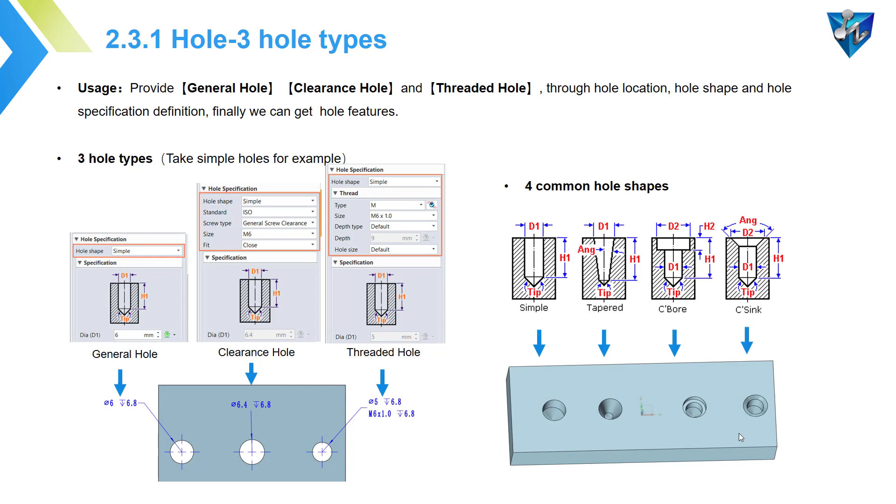And in ZW3D, we have four common hole shapes: simple hole, tapered hole, counterbore, and countersunk, which you can see in the below image.

There are some settings in the hole creation. The first one is add chamfer. In ZW3D, you can add chamfer for the holes along with the hole creation. For example, for this counterbore hole, we can add the chamfer for the start, middle, and the end side.

The second setting I'd like to show you is the tolerance. In ZW3D, you can create the tolerance for the hole. You can just type the value, like upper limit and the lower limit, and also you can use the tolerance belt to define the tolerance. And after that, you can show the tolerance in the PMI or also in the 2D sheet.

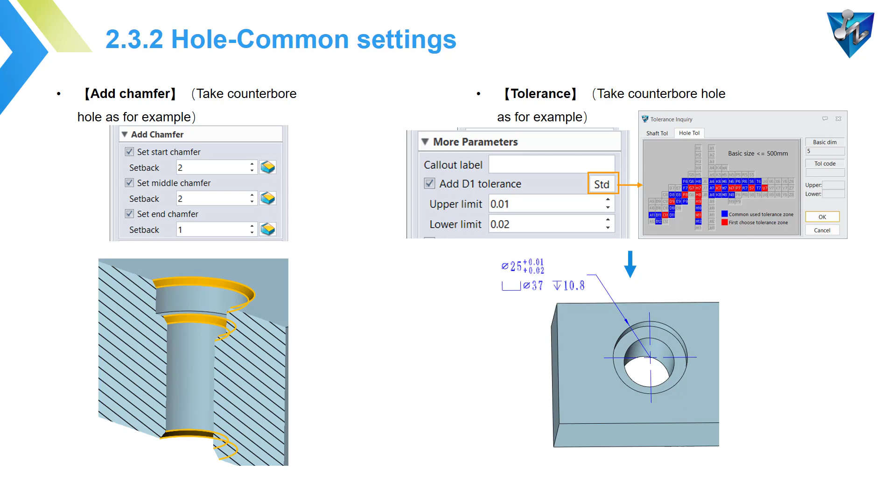And the next feature I would like to show you is the modify holes and the flag holes commands. For modify holes, it's very easy to understand. We can use this command to batch modify different types or different specification holes to a fixed type and specification. Like here in the left side, you can see there are several holes with different types, so we can use the modify hole command to change it identical.

And for flag holes command, we can use it to change the parametric free holes or Boolean holes to parametric holes. Like here, you can see we have imported shape which have no modeling history, so we can flag these two cylinder faces as hole features. You can see like this. Okay, now let's move over to ZW3D to show you more details.

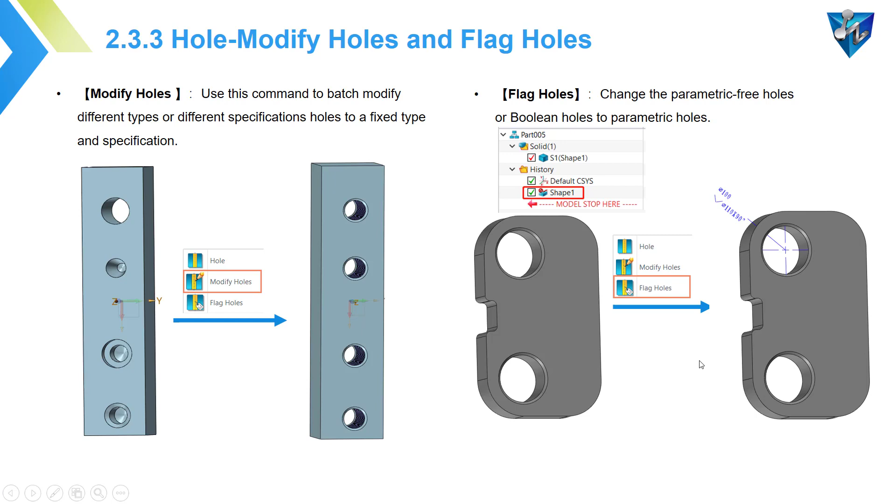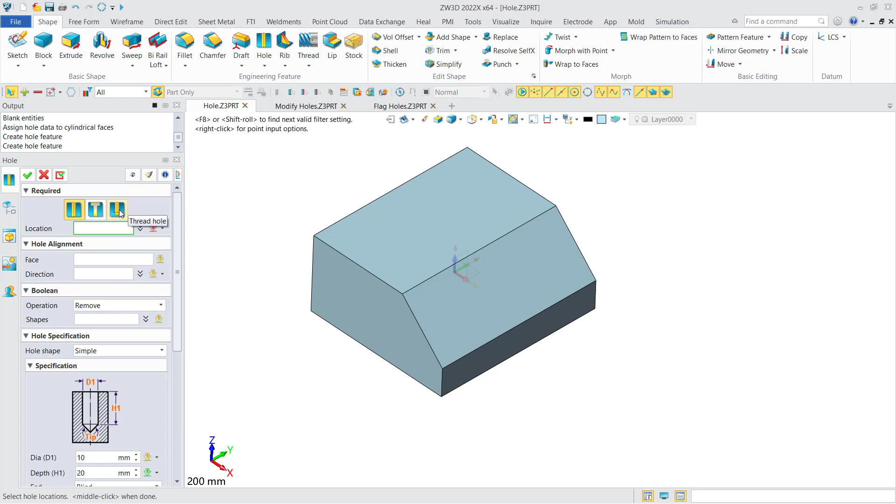Okay, here we are. So first, let's see the hole feature. Now you can see we have three hole types: general hole, clearance hole, and a thread hole. For general hole, actually it's very simple. We just define its location. Here is a little tip: in this location, you can use the right-click menu to define its location precisely.

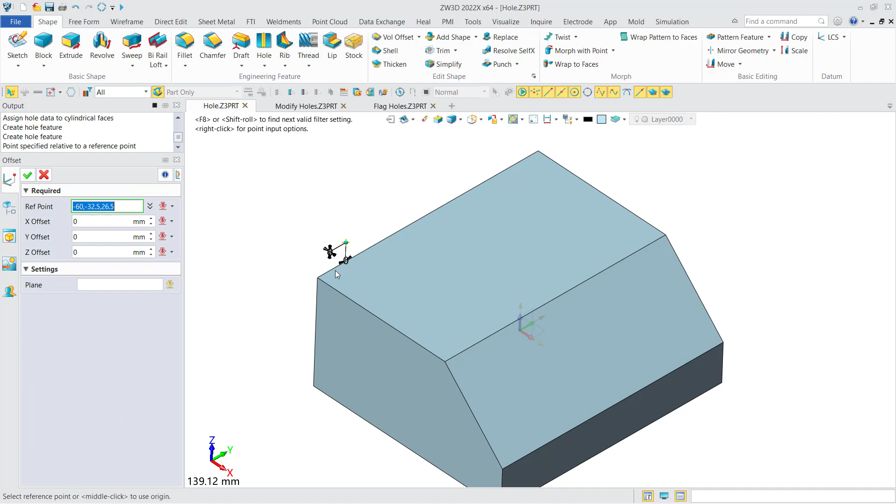Like we can make the offset. We define the ref point and the x offset and the y offset, even z offset. Okay, after that, the location will be fixed here. And next, let's see the specification.

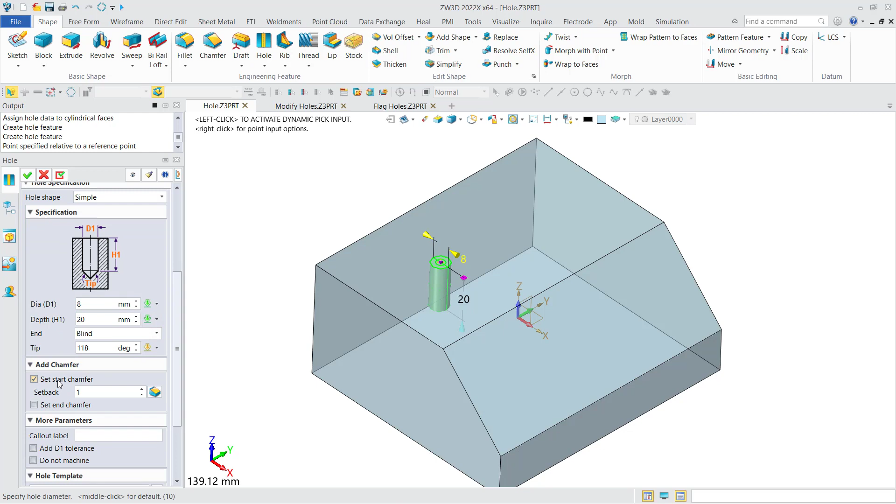Here you can see for the general hole, we just input its diameter. Like we change it to 8, and it will be smaller. And then we can add the start chamfer and end chamfer. Here we just add the start chamfer.

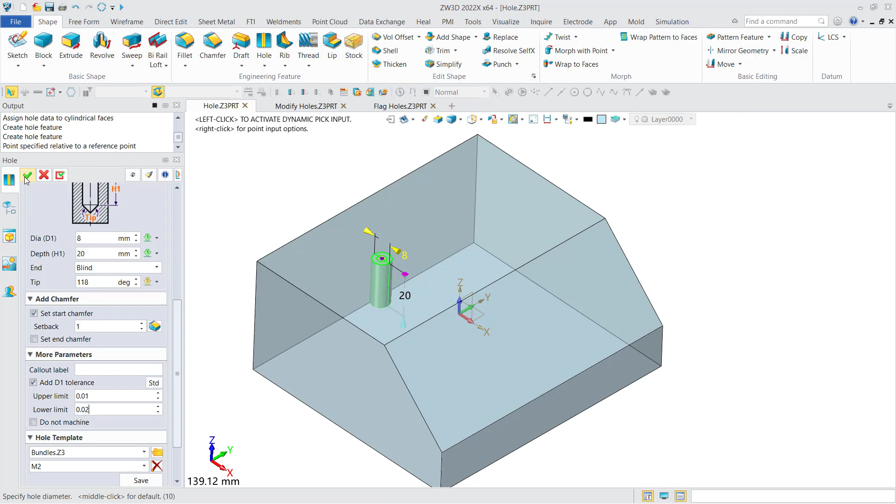And here we can add the tolerance, like the upper 0.01, 0.02. After that, we can click OK to get the result. It will be like this.

And then we can see the second type, it's the clearance hole. For clearance hole, actually, we do not need to input its diameter. All we need to do is define the screw size. Like the screw is M8, and then you can see the fit type we need to define. For close, the diameter will be 8.4. For normal, it will be 9. For loose, it will be 10. And you can also custom the diameter. Here we can use the close.

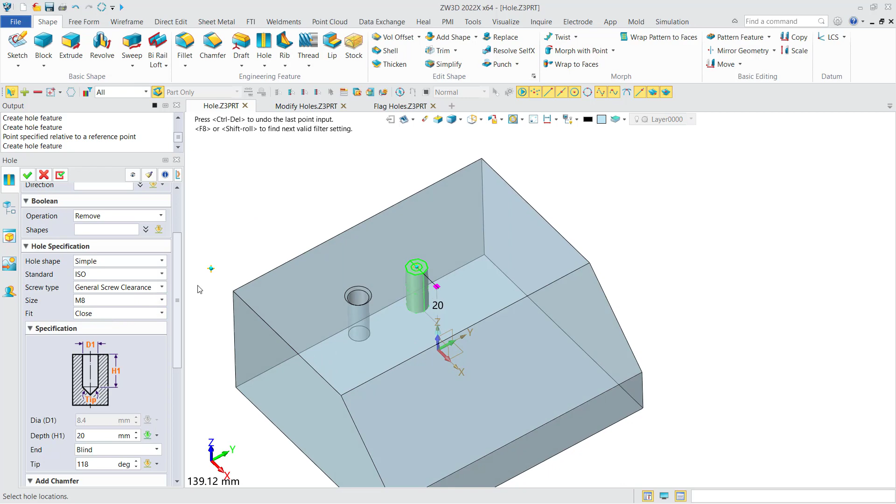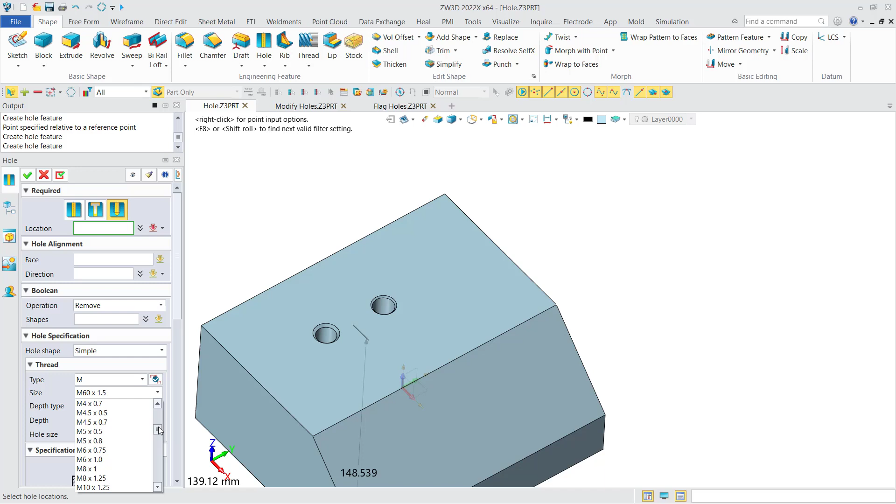And the other options are similar to the general hole. Now we can get the result. And for the last one is the thread hole. It's too big, make it M8. And we define location, and then we define the thread parameters.

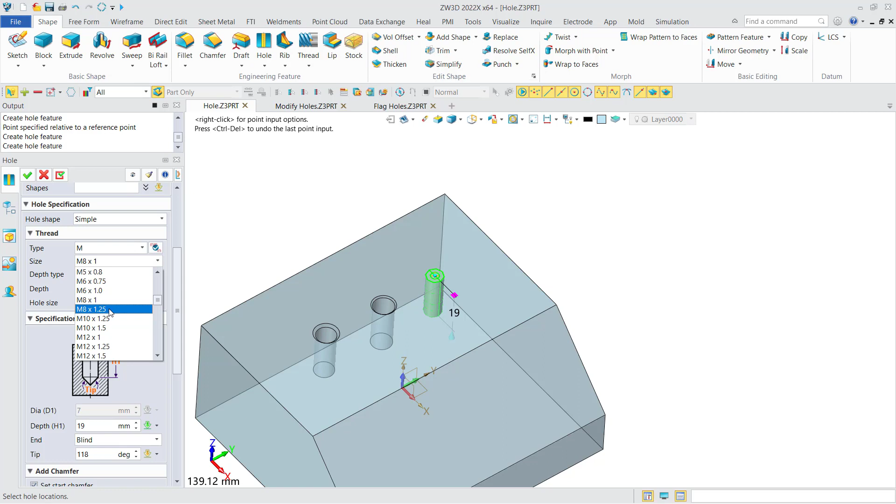Like here we can use the M8 multiplied by 1, or M8 multiplied by 1.25. Okay, now you can see the result. Now we can make the PMI for the hole to see the difference. Hole callout.

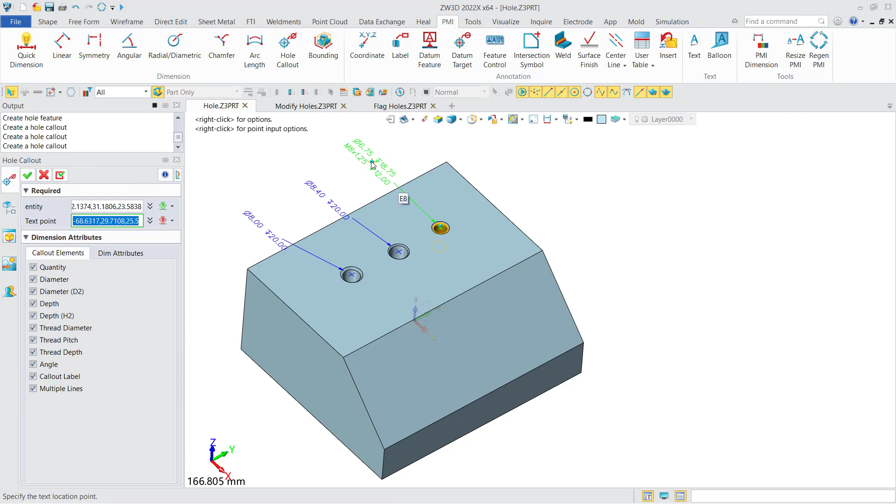Now you can see the difference between these three hole types. And there is another important option for the hole.

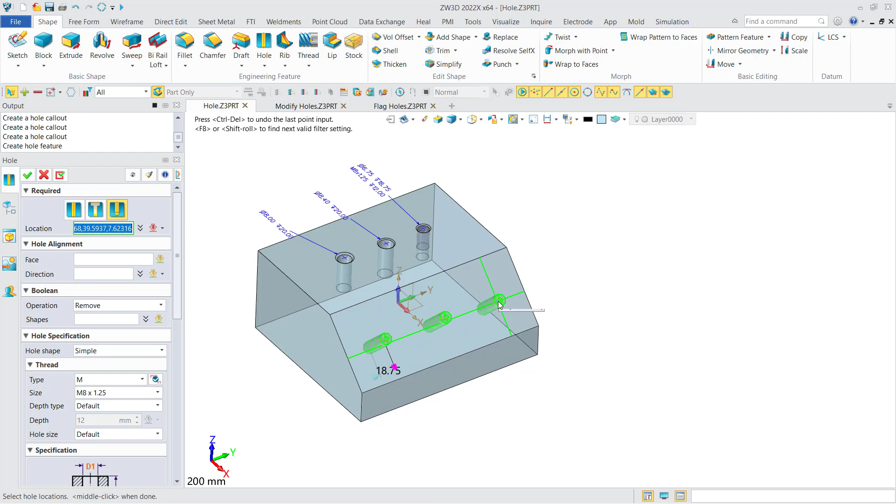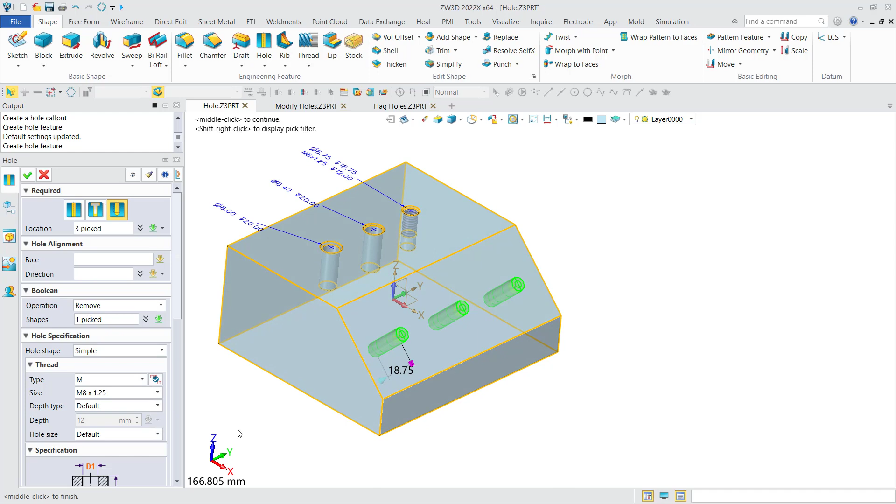It's about the hole alignment. For example, if we want to make 3 holes in this inclined face, by default the hole direction is perpendicular to the inclined face, so the result will be like this. But if we want the hole direction to be parallel to the Z direction, what should we do?

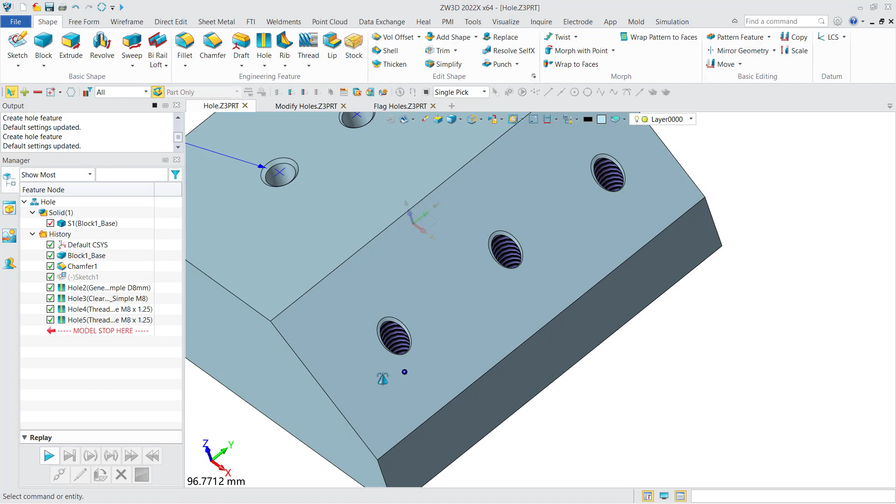Here I'll show you how to do it. In the hole alignment, we just define the direction. Here we can use the Z axis, it's -Z. Okay, now you can see the preview, it will be changed to the Z direction.

Next, I'd like to show you how to use the modify holes command. This command is used to change the parameters for multiple holes. For example, here we have 3 holes with different parameters. Now we can change them in batch. First we select the 3 holes, and then we change the hole specification.

We make it thread holes, and we make it counter bore as the hole shape, and we make the parameter M12. Then we change the height, and then we can make it through all. Now let's see what will happen.

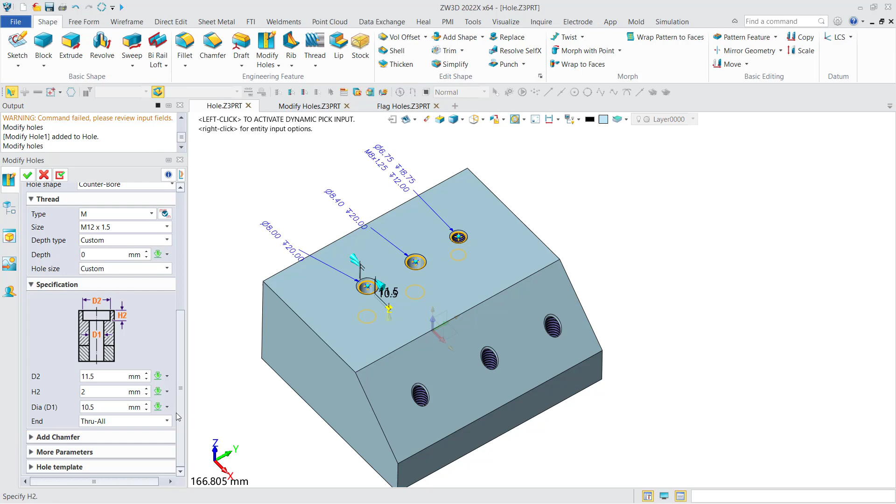Now you can see we have changed the 3 holes to a threaded hole, and they're all counter bore. So this is the usage of modify holes.

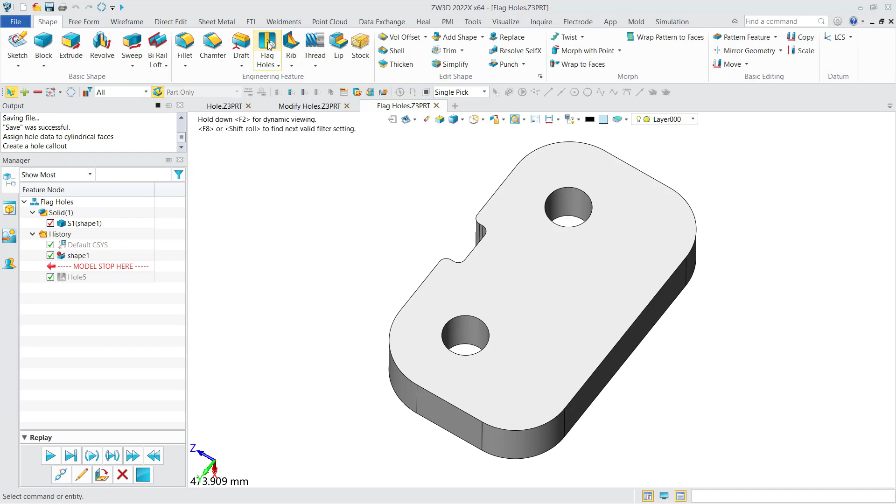Next, I would like to show you the flag holes command. We have an imported part which has no modeling history. So if you want to make the hole call out, you can see you cannot select the cylinder face because it's not a hole in ZW3D. This is where we can use flag holes. The required input is a face, the cylinder face.

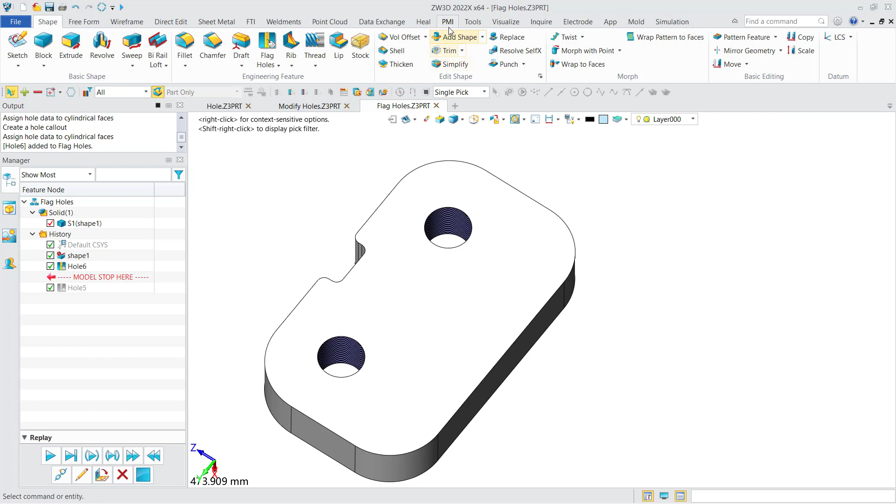And then we can define the hole specification. Here we make it M60. Now you can see it's a hole in ZW3D right now. Now if we try to make the hole call out again, you can see it succeeds.

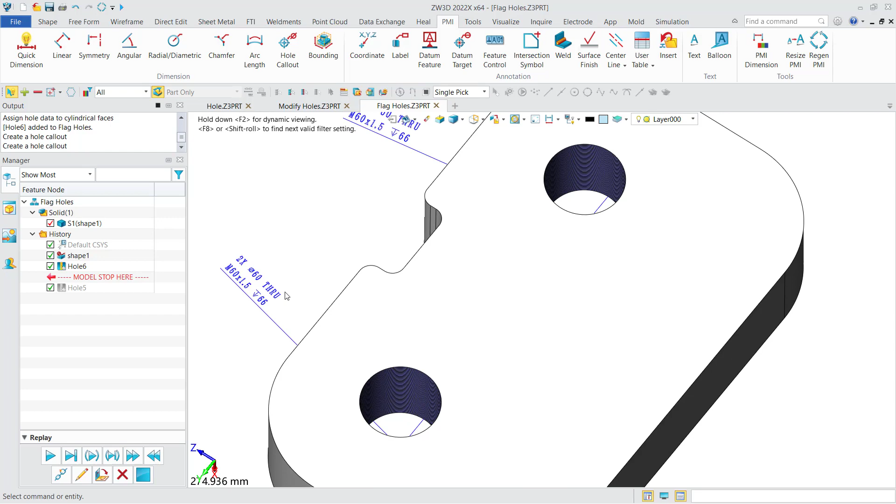The next feature I'd like to show you is rib and rib network. In mechanical design, we often need to make a rib, so in ZW3D we provide two commands to create such features. The first one is rib. We can use this command to create a single rib feature from an open profile. All we need to do is define the profile, the thickness of the rib, the draft angle, and also the boundary. Then we can get a rib feature.

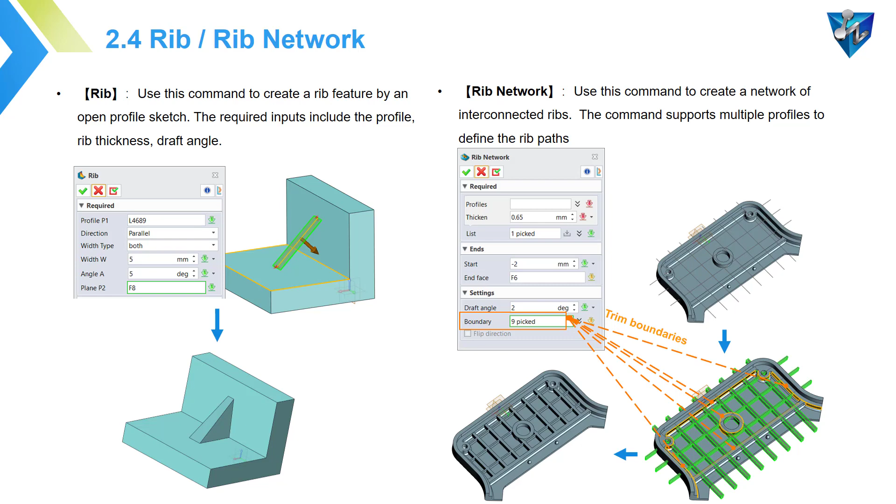For the rib network, we can use this command to create a network of interconnected ribs. We do not need to care about the length of the profile because we can trim the rib in this command. Now let's move over to ZW3D to show you more details.

First let's see the rib command. This can be used to make a single rib. Here we already have a profile. We select it, and then we can define the directions, the direction of the rib, parallel or vertical. So apparently here we need parallel.

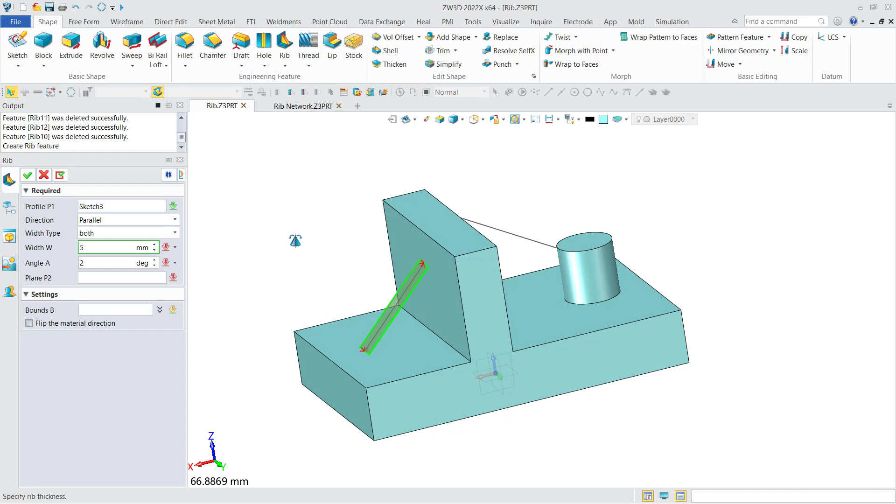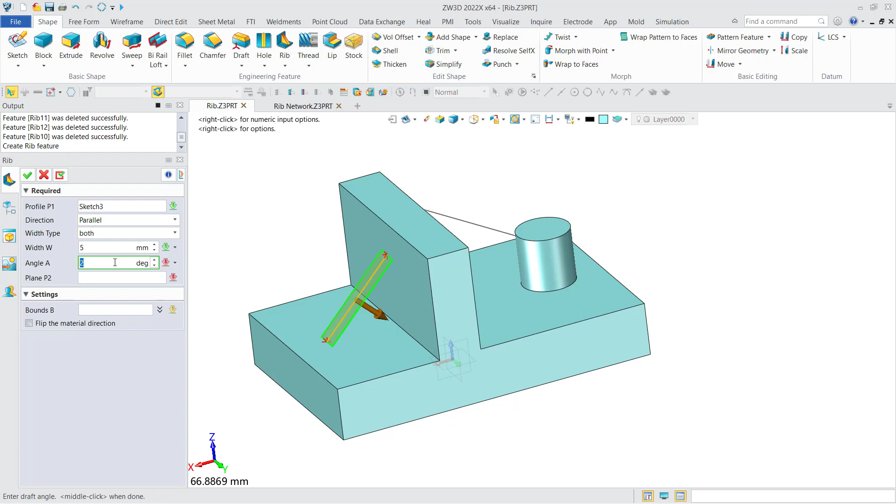And the next one is the width of the rib. We can make it bigger or smaller. Also, we can draft the rib when we're creating this feature. We can give it 3 degrees of draft. And then we define the stationary plane, this one. And then we define the boundaries.

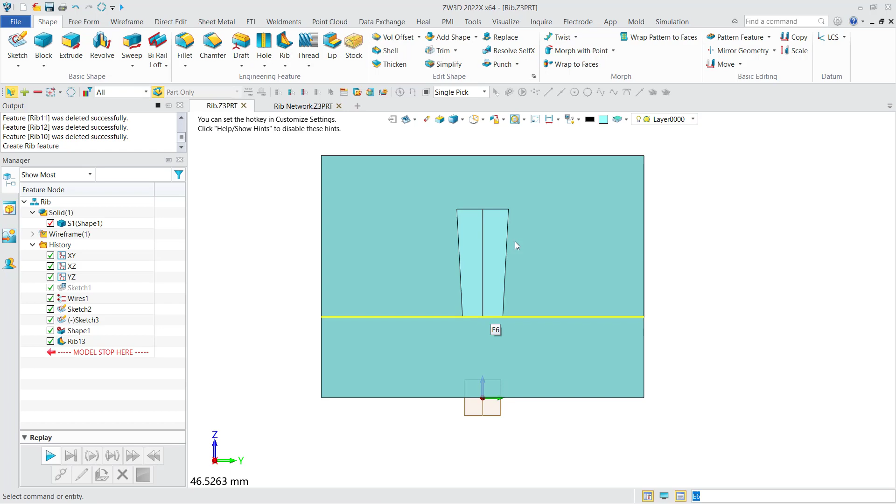Then you can see the rib feature is created, and here you can see it actually has a draft angle here. So this is very convenient.

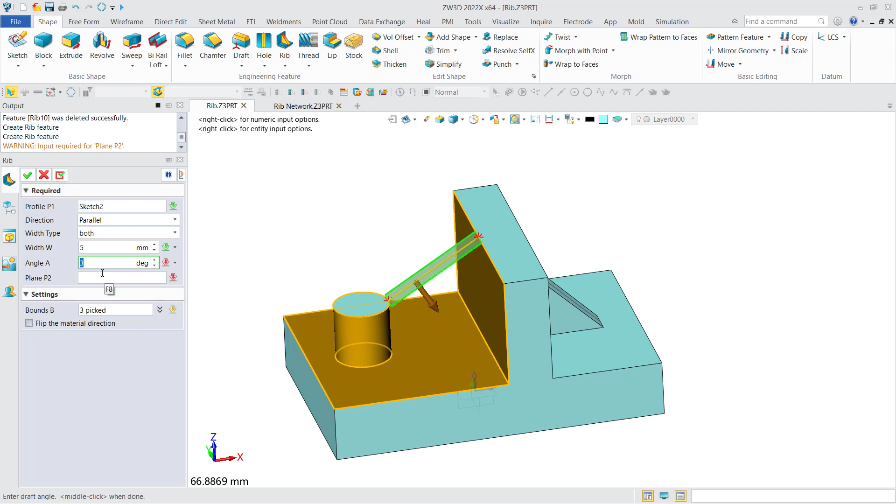Also for the rib feature, we can define multiple boundaries. Here we can make the draft angle to be 0. Now you can see this is the result. Okay, this is about the rib feature.

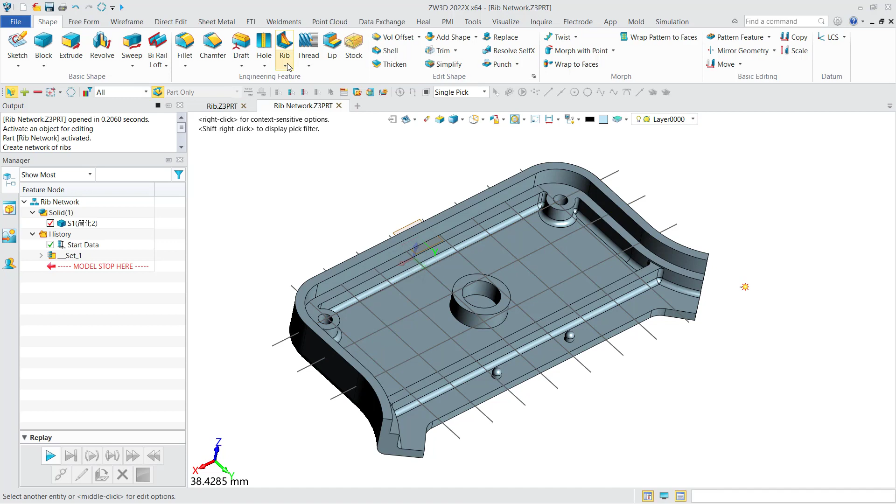And for rib network, it's much more powerful. Here you can see we have two sketches in different directions, this one along the X direction and this one along the Y direction. So here we can make it as the path of the rib network. Now we can see how to use it.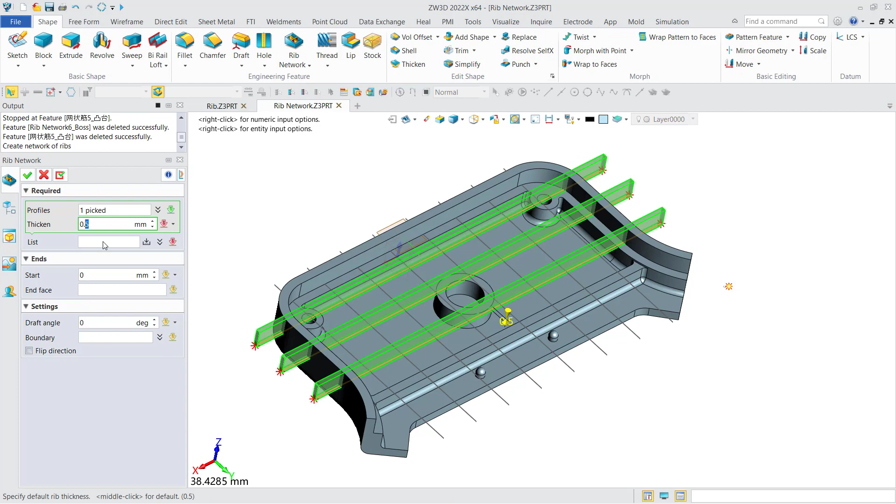First, we select the profile in the X direction, and we make it 0.55 as the thickness, and add it to the list. And we select another profile, and we can make it 0.5, and add it to the list. Then you can see different profiles with different thicknesses.

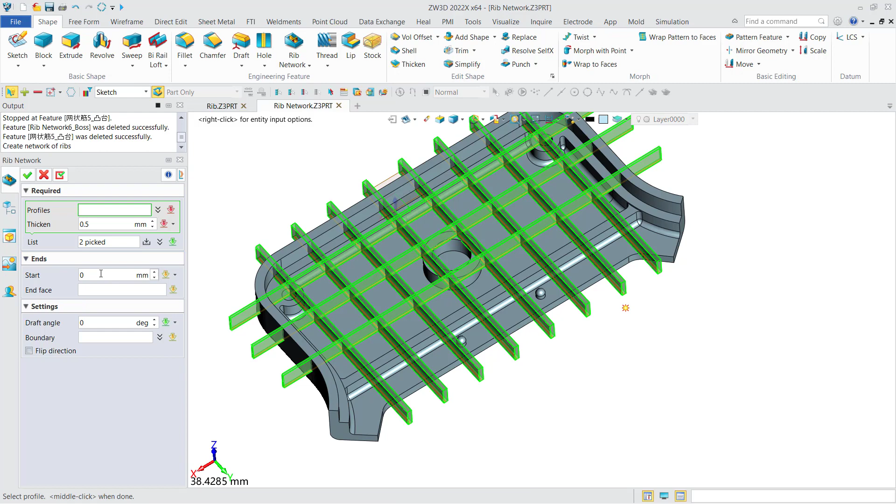And then we define the start side and the end side of the rib network. For the start, we can make it -2, and at the end we can make it the bottom.

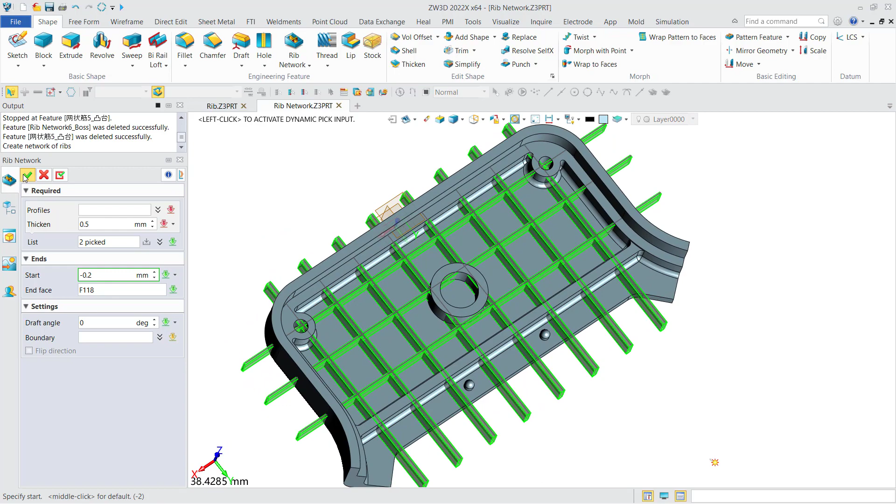Okay, 0.2. And also we can make the draft angle here. And another one is about the boundaries, because by default you can see the result will be over this product. It's not what we want.

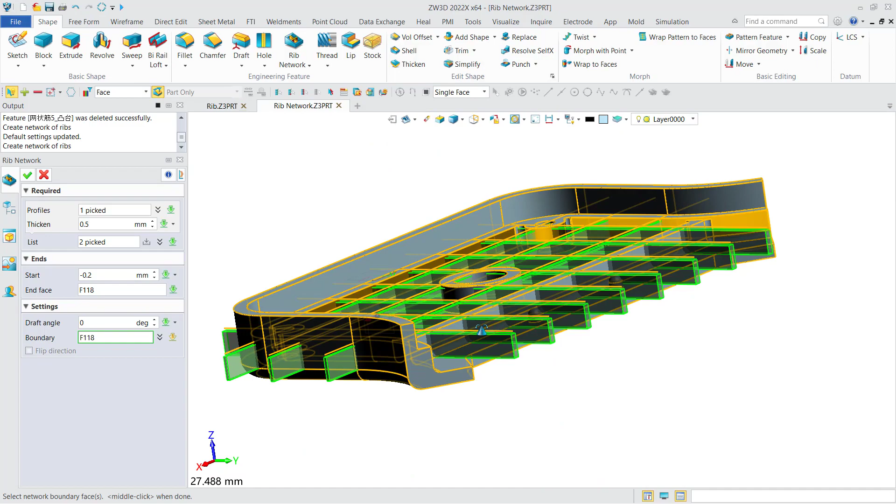So here we can redefine it, and we define the trim boundary: this face, this face, this face, this face, this face, this face, this face, all faces, and the cylinder face in the middle. Now you can see it's much more better. We can hide the sketch to see it more clearly. Now this is the result. Very, very good, right?

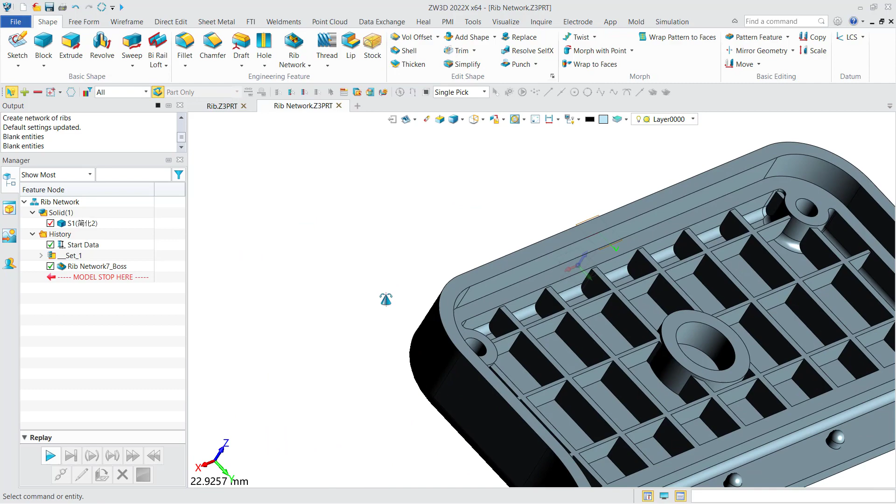Okay, this is all about the rib and the rib network feature.

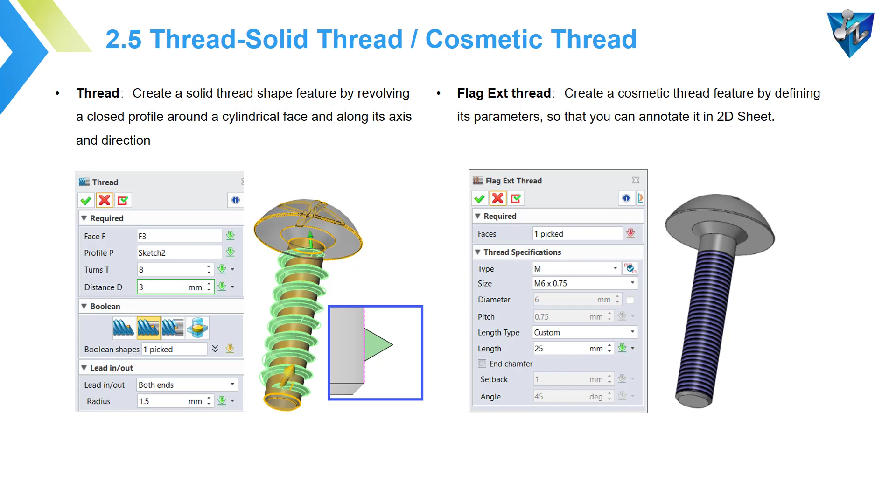Next I'd like to show you the thread, solid thread and cosmetic thread. In ZW3D we have both thread types. For solid thread, you have to create a solid feature by revolving a closed profile around a cylindrical face, so this one is very easy to understand with the below image, like this. And for cosmetic thread, you can make a texture-like thread along the cylinder face. In ZW3D we always recommend you use the cosmetic thread, because it's more efficient and saves you more time for regeneration, and also you get a smaller model size. Now let's move over to ZW3D to show you more details.

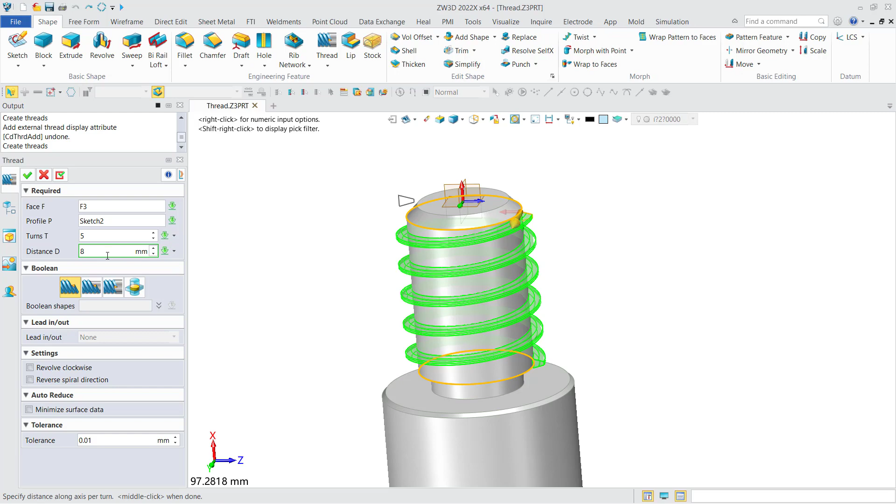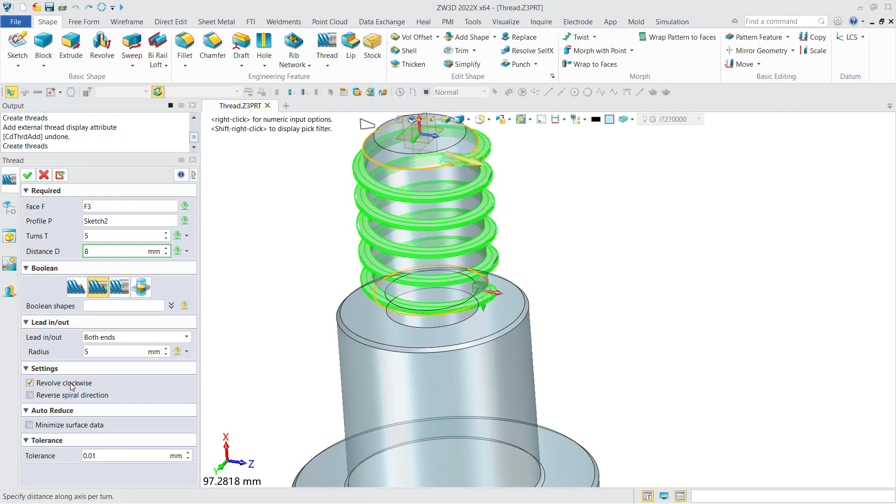Now let's see the solid thread. All you need to do is select the cylinder face and a profile, then define its turns - like we make it 5 - and the distance we make it 8. This is very similar to the spiral sweep, and we can also define the Boolean operation, and the lead in and lead out. Here we make both ends lead in. We have more settings here, like clockwise or anti-clockwise. Now you can see the result is as below.

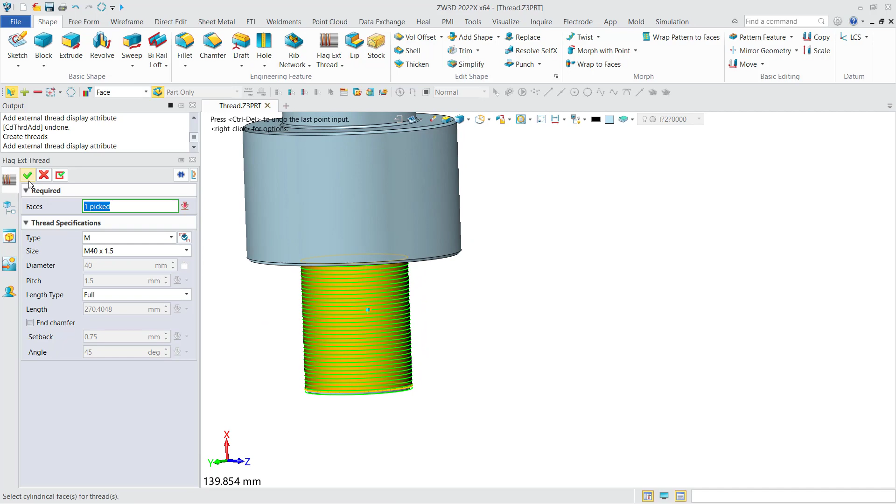And for the cosmetic thread, we use the flag external thread command. This one is very simple: we just select the cylinder face, and define the thread specifications, like here we use M40 multiply 1.5. The length type can be by default - you can see there is a length, and you can also make it 1 times or 2 times of the diameter, like this. We can also just use full, and it will cover the whole cylinder face. Then we click OK to see the result.

Next, I'd like to show you lip and stock features. For lip feature, we can create a lip feature based on two offset distances, and there's a step you need to pay attention to: select the edge, define the first offset side, and then input the offset values. Later I'll show you in the software.

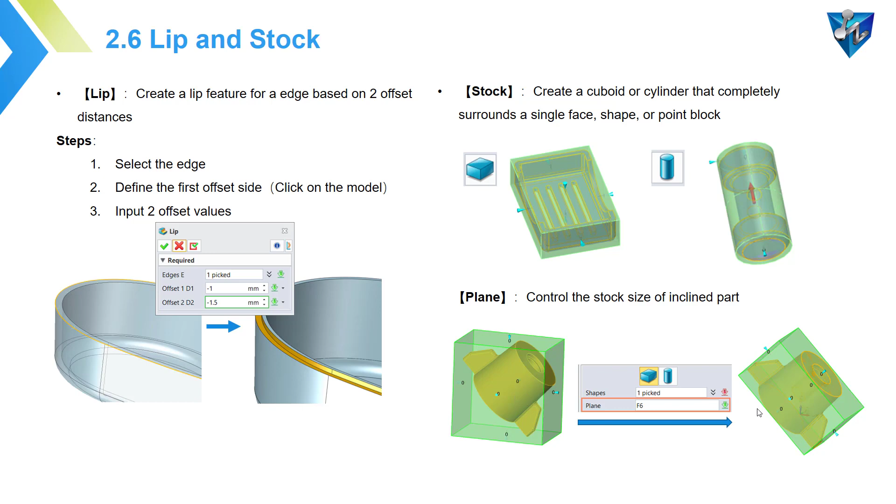And for stock, it's very easy to understand - it means we can create a cuboid or cylinder that completely surrounds a single face, shape, or point block. There's just one option you need to pay attention to: the aligned plane, which lets you control the stock size of an inclined part. Something like the below image. Now let's move over to the software to show you more details.

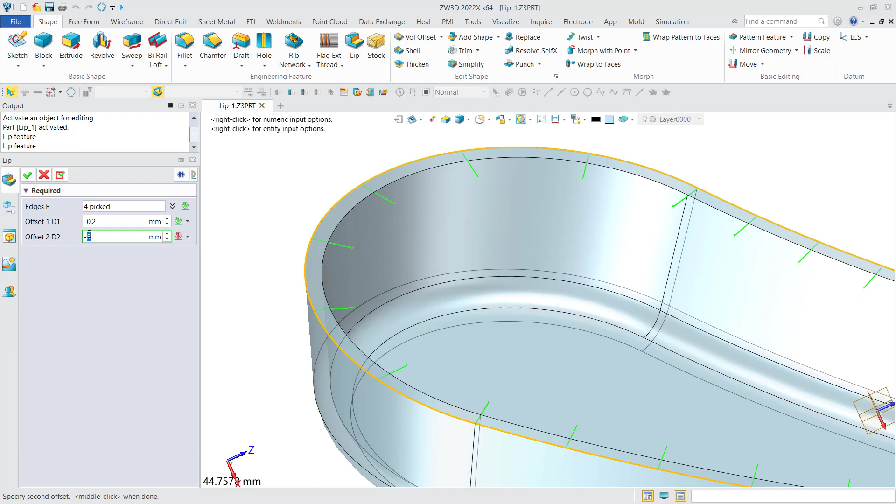Now I'll show you how to create a lip first. Click lip, select edges, then define the first side, this one, and then define the offset values like 0.2 and 0.5. We can make it a little bit bigger. Now you can see the result - we can change the color to show you more clearly. Now you can see this is the lip feature.

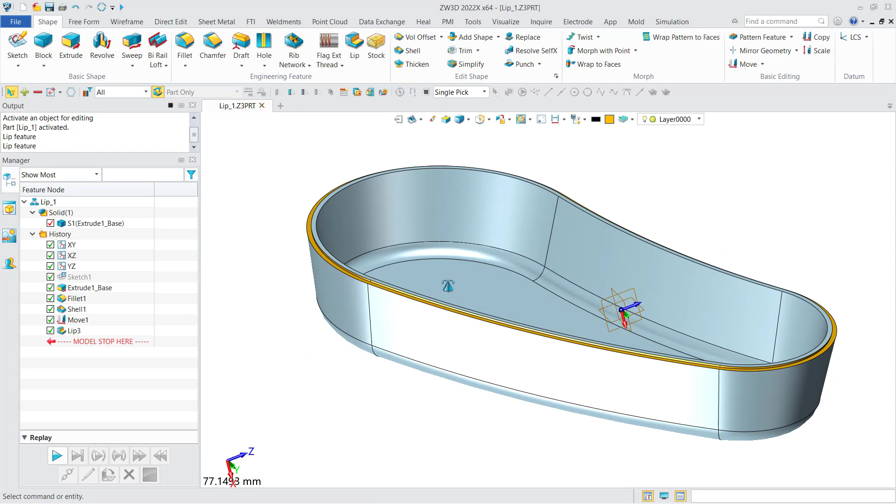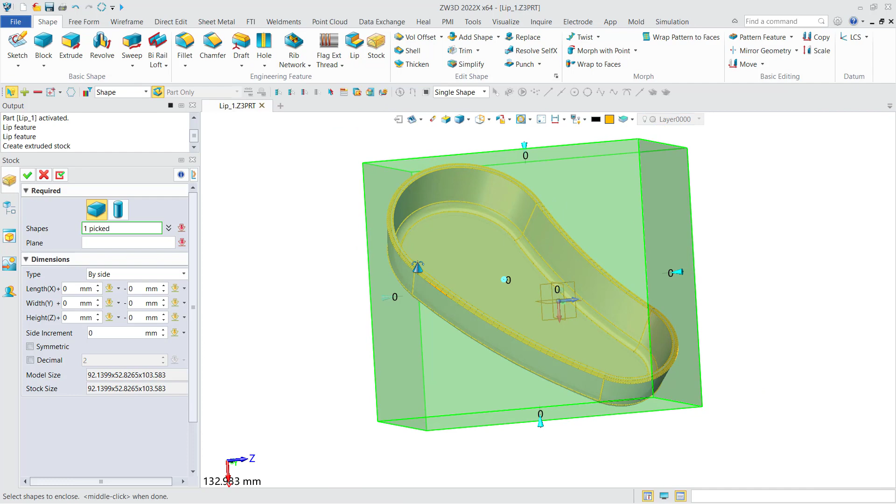And for stock, it's very easy to understand. We can create a block or cylinder by a single face, multiple faces, or a whole shape. We unpick last and select the whole shape. We can click OK to get the result. And it can also be a cylinder, with an axis.

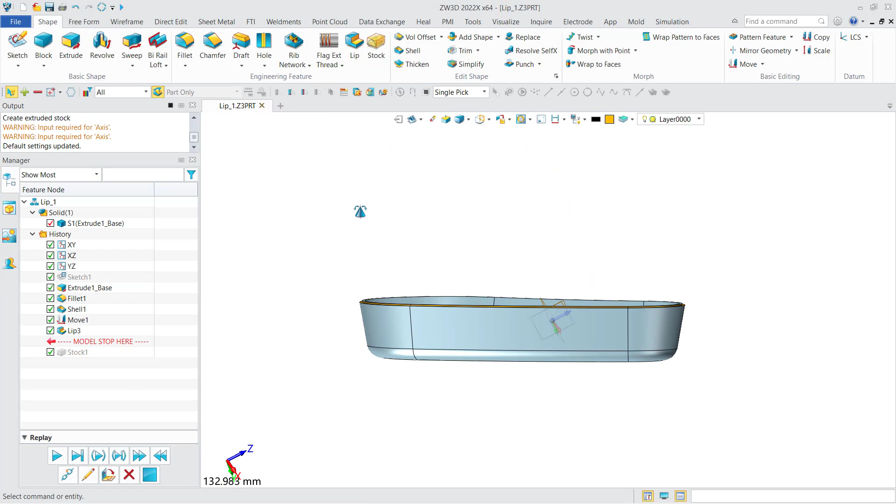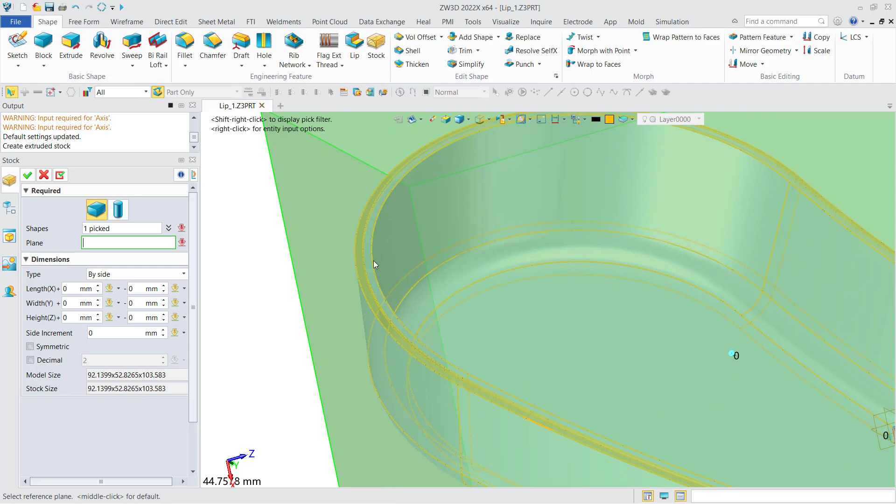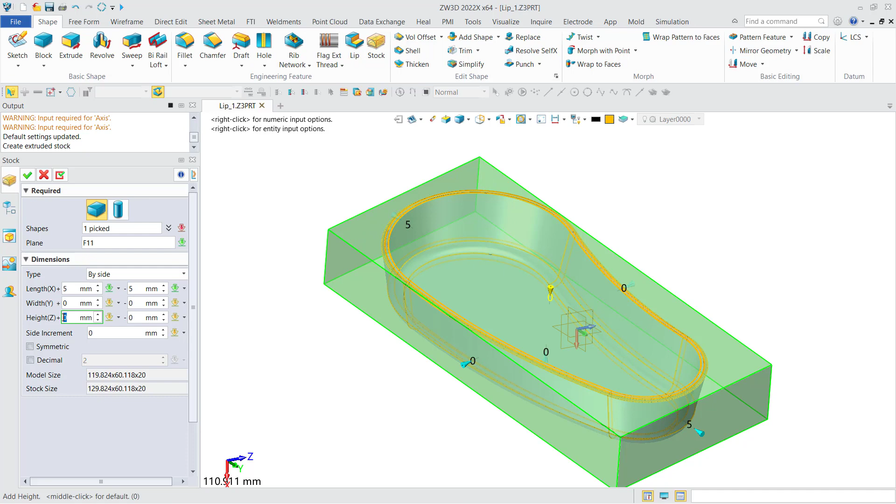There's one option you need to know: it's about the plane. For this part, which is an inclined part, we need to define the aligned plane to get the minimum stock. We can select this one as the aligned plane. Now you can see it's more reasonable, right? You can also adjust the size of the stock - make it bigger or smaller, like 5 here. This is the result.